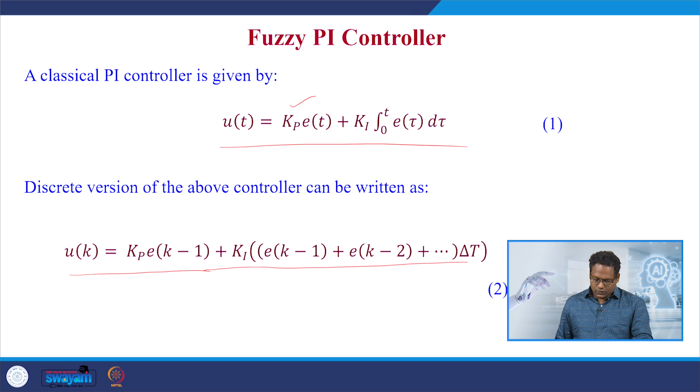...plus ki*(e(k-1) + e(k-2)), and it continues, multiplied by delta t. From the above two equations we can say u(k) - u(k-1) is given by kp*(e(k) - e(k-1)) plus ki*e(k)*delta t, where delta t is the sampling time.

We can say that u(k) is given by u(k-1) + delta u(k), where delta u(k) is a function of error and change in error, given by u(k) - u(k-1), as a function of E, change in error, and higher order forms.

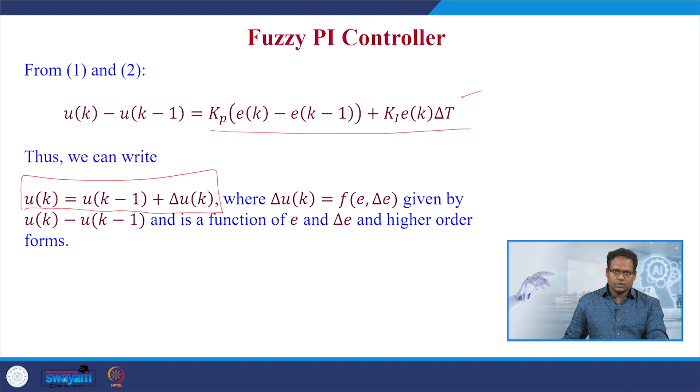Now coming to the fuzzy PI controller, the fuzzy controller has the control structure u(k) = u(k-1) + delta u(k), and using the fuzzy rule base, delta u is obtained, which is an incremental control action that is a function of error and change in error, E and delta E respectively.

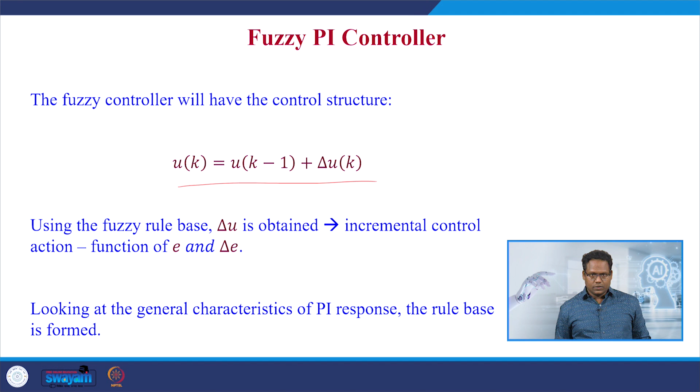Looking at the general characteristics of a PI controller response, the rule base is formed for the fuzzy PI controller. Consider the response of the PI controller with nomenclatures: PL stands for positive large, PM for positive medium, PS for positive small, ZE for zero, and NS for negative small. This is the response relative to the steady state desired output, which is 1 here. The error is given by yd - y, where yd is the desired steady state output and y is the actual output.

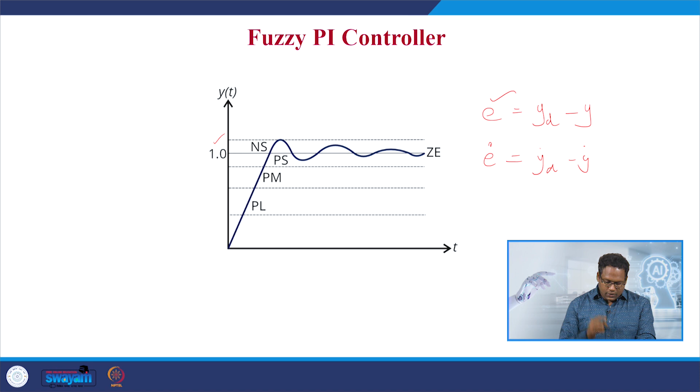From this response we can derive the rules using E and E dot, which is the change in error. Let us take one example: if the error is 0 and the change in error is also 0, then the incremental control action delta u is 0.

If the error is positive small and change in error is 0, then the incremental control action is positive small. Likewise, if the error is positive medium and the change in error is positive medium, then delta u should come out to be positive large.

If the error is positive small and the change in error is negative small, what will delta u be? It is 0, because the change in error is negative, negative small, so it is going to get reduced slowly.

We are here because of the positive small error, and it has to reach the desired value, with the change in error also reducing. This means the actual value, as time goes on, is decreasing towards the desired value, so in that case we do not have to give any delta u, that is why it is 0.

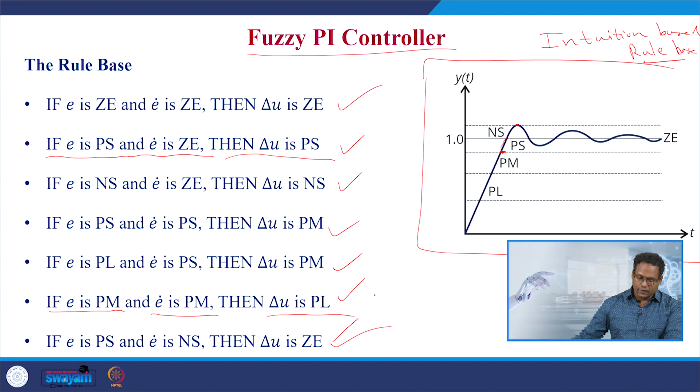Now let us move on to the fuzzy PD controller. A classical PD controller is given by the control law u(k) = kp*e(k) + kd*(e(k) - e(k-1))/delta t. Thus, the control action u is a function of e(k) and change in error.

If you want to have the rules, we can base them on 3 linguistic variables: e, e dot, and u, where u is the output linguistic variable and e, e dot are input linguistic variables.

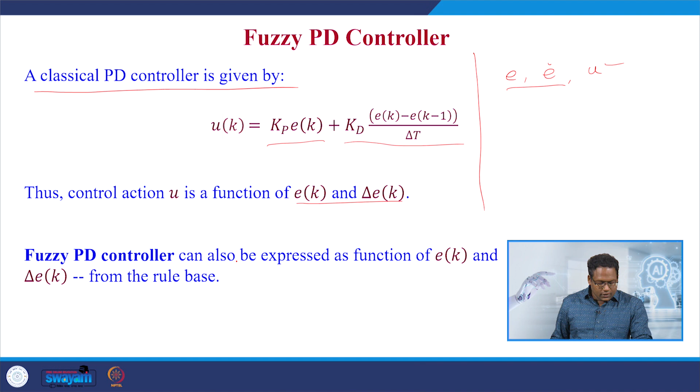Now, the fuzzy PD controller can also be expressed as a function of e of k and delta e of k to form the rule base, as I told. Let us take an example, that is say a 2-link Cartesian position control, 2-link robot Cartesian control, like you need to control the position of the end effector.

I need to go here. So this is your x desired, this is your x actual. Now that is my goal.

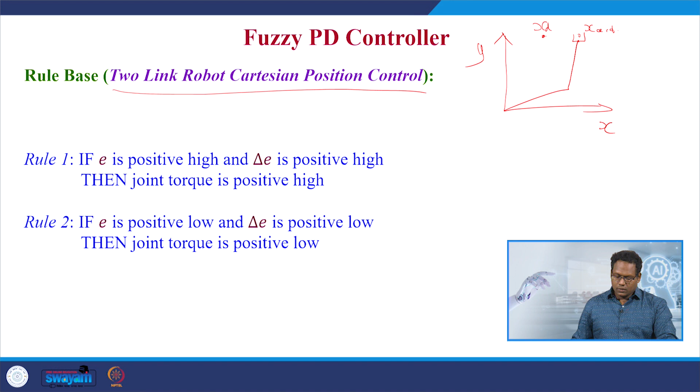So if we are going to derive the rules for this control objective, to have the 2-link planar robot reach a desired position in the Cartesian space, we are having here E, error, and delta E, change in error, as the two input linguistic variables for the fuzzy controller, and U being the joint torque. What will happen in this case?

Rule 1 can be: if E is positive high and delta E is positive high, then the joint torque is positive high, because if the error is too large, then your x actual is very far from reaching the desired value. Also, your change in error is positive high, which implies that at every instant the actual value is not moving towards the desired value of the robotic system. The robot has to reach xd, so change in error keeps increasing, which is positive high, implying that the current robot end effector is not moving towards the desired value xd. So joint torque must be positive high to bring it to the desired value xd. That is what is given in rule 1.

Likewise, let us move on to rule 2. If the error is positive low, that means you are close to the desired point in the Cartesian space, and your change in error delta E is positive low, then the joint torque is also positive low, because of the closeness to the desired position. Your change in error being positive low means that at every instant the actual position of the robot is moving towards the desired position, and hence the joint torque, the control signal given to the robotic system, that is tau 1, tau 2, is also low.

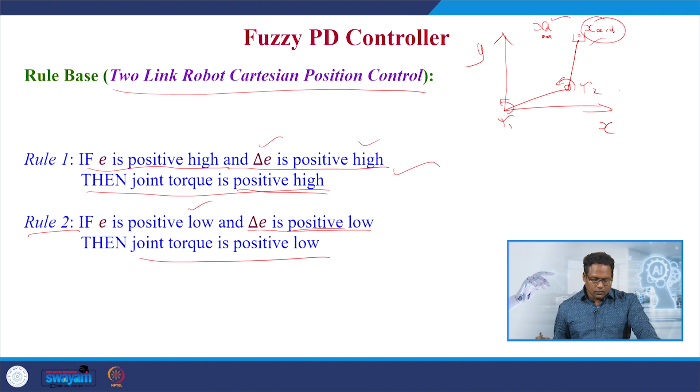Now let us see an example with a single link manipulator PD controller, implementation of a PD controller towards a single link manipulator control. Let the dynamic model of a single link manipulator be given by tau equal to theta double dot plus 10 multiplied by sine theta, where theta is the joint angle from the vertical position and tau is the joint torque.

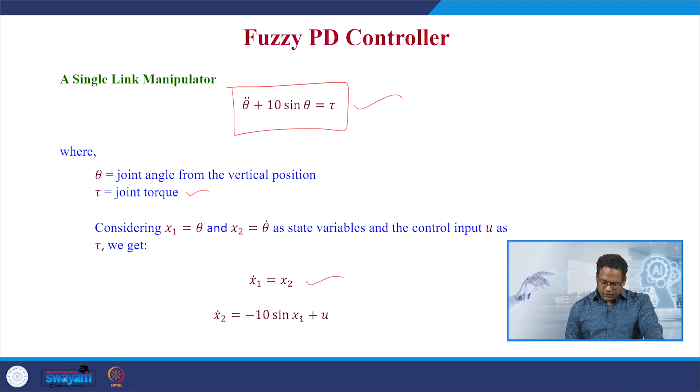Considering x1 as theta and x2 as theta dot as the state variables, and the control input u as tau, we can have the state space model of this single link manipulator as x1 dot equal to x2, and x2 dot equal to minus 10 times sine of x1 plus joint torque u.

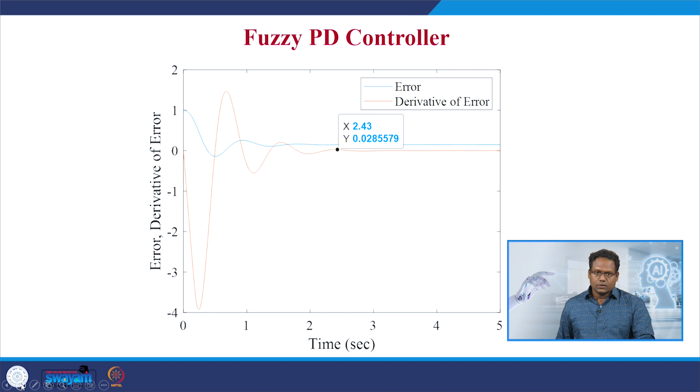With this hard limitation of the control signal, we get the response shown in the slide, where the settling of the system comes around 2.5 seconds, or precisely about 2.43 seconds. Then we have the time history of the error and derivative of the error, where you can see there is a steady state error for the joint angular value, and hence the error is not becoming zero in this case. For a desired value, it is not converging. We need to tune the Kp and Kd control gain parameters to obtain zero steady state error. Now there exists some steady state error in this situation.

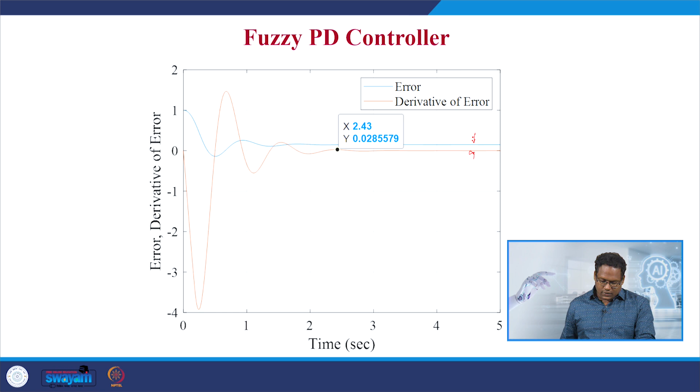Now let us design a fuzzy PD controller for this same problem. So we need to form the rules. Let us say that the fuzzy sets associated with the input linguistic variable E be negative, positive and zero. Likewise, the other fuzzy input linguistic variable has the fuzzy subsets N, P, Z.

So that will give you the output based on your value of fuzzy linguistic variable 1, that is E, and fuzzy linguistic variable E dot. Based on that, E is negative, positive, or zero. Now there are two linguistic input fuzzy variables with the fuzzy subsets being 3. So the number of rules is R equal to Q power n, with the two state variables and Q being 1, 2, 3. So 3 power 2 equals 9 rules formed with this combination of negative, positive, zero for E and E dot.

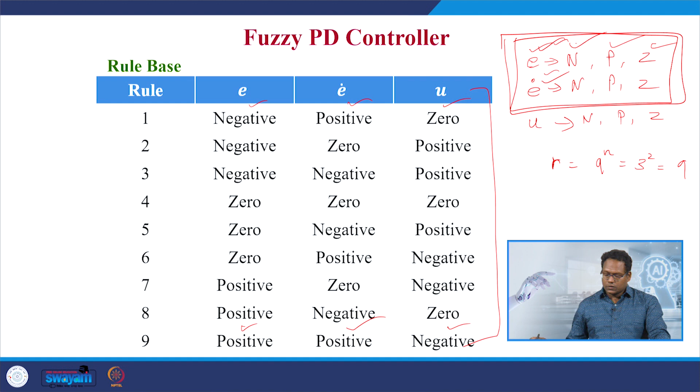Once we form these rules, we find the membership function values for the corresponding rules, for this input membership function value we do the AND operation to give the consequent membership function value.

When we do the maximization of the consequence of all the rules, we get the output distribution. From the output distribution, we can get the crisp value upon defuzzification, using either center of gravity approach or weighted average approach. That crisp value is the control signal u, given to the single link manipulator.

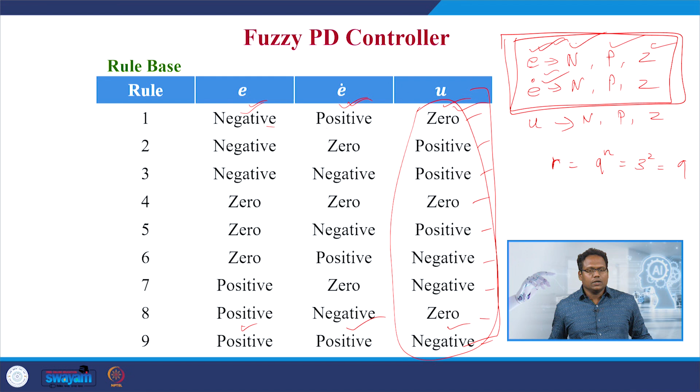So the simulation we have done in this problem is as such. For each instant, you have the crisp output value obtained from the output distribution as such. Because this is a regulation problem, your control signal u converges to 0, as you can see once the complete iteration gets over. Once the complete iteration gets over, your crisp output value is 0, because this is a regulation problem.

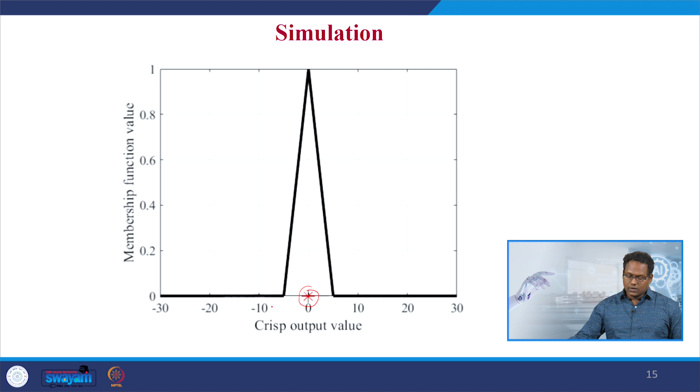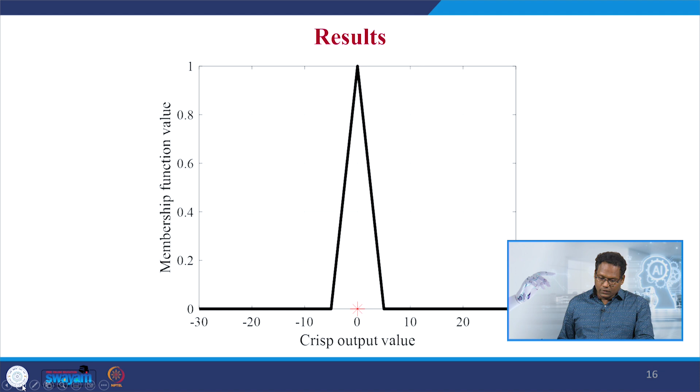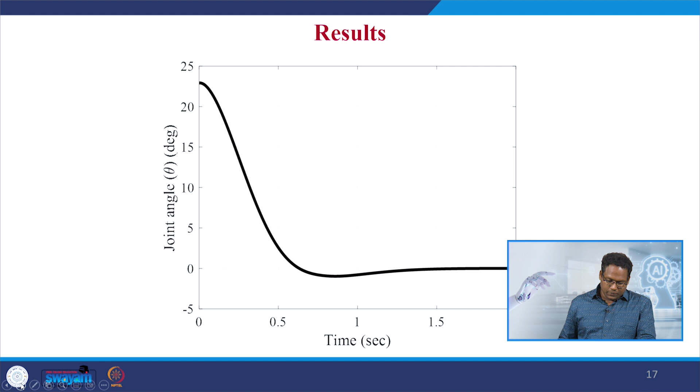These are the results we obtained from this simulation study of a single link manipulator using a fuzzy PD controller. Finally, we have our joint angular trajectory, showing convergence of the joint angle of the single link manipulator. We started with some value around 23 degrees and it converged to 0 degree, hence it is a regulation problem. You start from some non-zero value and make it converge to 0, and hence your control signal in this problem converges to 0 as well.

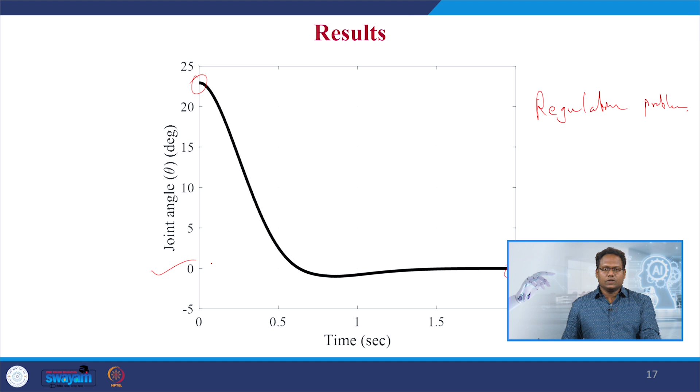Now let us talk about the Lyapunov-based approach. This implies explicitly that we are going to use a Lyapunov function candidate, which is a positive definite scalar function candidate, utilized to develop the rules. So far we have seen rules developed based on intuition, whereas here we have Lyapunov stability analysis in order to form the rules.

Let us have a simple example given by the linear model x dot equal to Ax plus Bu, where x dot is given by a 3 cross 3 matrix multiplied by x plus a 3 cross 1 vector multiplied by u, where A is the 3 cross 3 matrix given by 0 1 0, 0 0 1, 0 0 0, and the B vector is given by 0 0 1. Here the state variables are x1, x2, x3.

The fuzzy subsets for these inputs are positive, 0 and negative for each: x1 positive, 0 and negative, likewise for x2, and for x3 again positive, 0 and negative. So how many rules are we going to have? Definitely 3 power 3, since there are 3 state variables and 3 subsets associated with each, giving 27 rules to form the rule base. The fuzzy subsets for output u are large positive, positive, 0, negative and large negative.

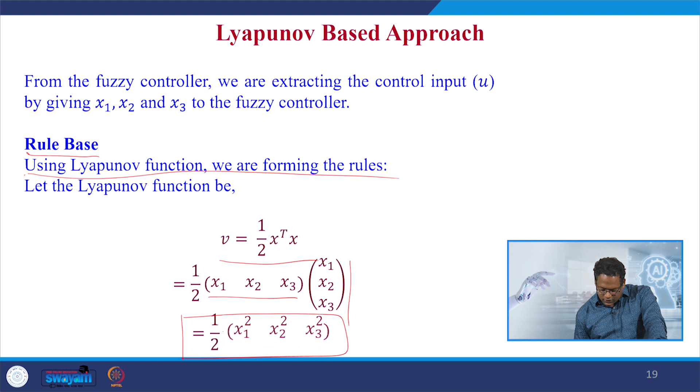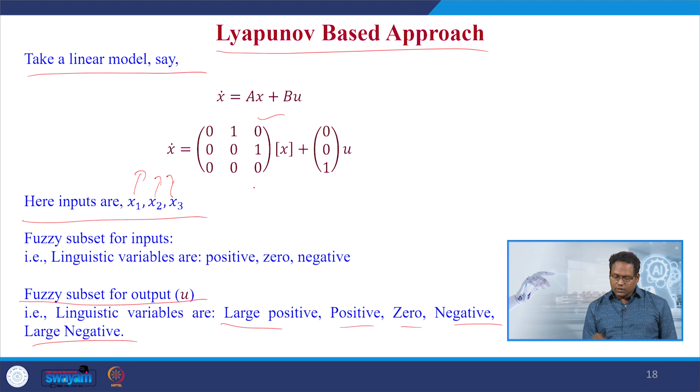Now we want v dot, the time derivative of the Lyapunov function candidate, to be negative definite. So we take the time derivative, v dot equal to x1 x1 dot plus x2 x2 dot plus x3 x3 dot. From the state space model, x3 dot is nothing but u. So we have x1 dot, x2 dot, x3 dot on the left hand side. Expanding that, x3 dot equals the control input u. Thus it is given expanded as v dot equal to x1 x2 plus x2 x3 plus x3 into u.

The objective of this controller is to find a control input u such that the system is stable around x equal to 0, because x equal to 0 is the equilibrium point. From Lyapunov theory we know that v dot should be less than 0, that is negative definite. Now using this we will try forming the rule base for the controller.

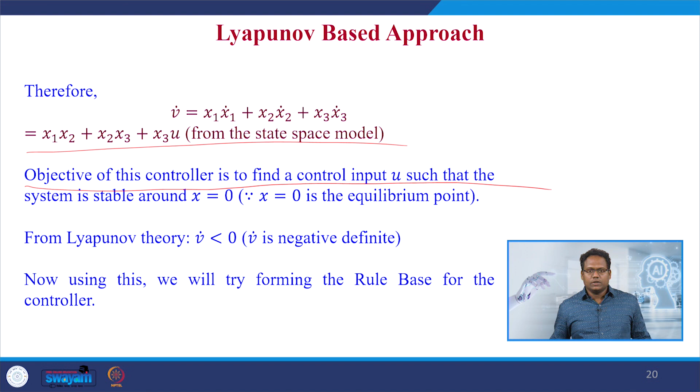First let us consider all 3 state variables x1, x2, x3 are positive. To make v dot negative, we analyze the expression for v dot: v dot equals positive plus positive plus positive into u. Since x1, x2, x3 are all positive, the first term is x1 x2, the second is x2 x3, and the third term is x3 and x3 dot, where x3 dot is u, so positive into u. In that case u should be large negative in order to have v dot be negative.

Accordingly the rule statement is: if x1 is positive and x2 is positive and x3 is positive, then u is Ln, which is large negative. That is how we are done with rule 1.

Similarly, consider the case x1 equal to 0, x2 greater than 0 and x3 less than 0. In that case v dot is 0 plus negative into u, so u should be positive or 0 to make v dot negative. Therefore the rule is: if x1 is 0 and x2 is negative and x3 is negative, then u is positive or 0. Likewise, for different combinations of inputs we get a total of 27 rules.

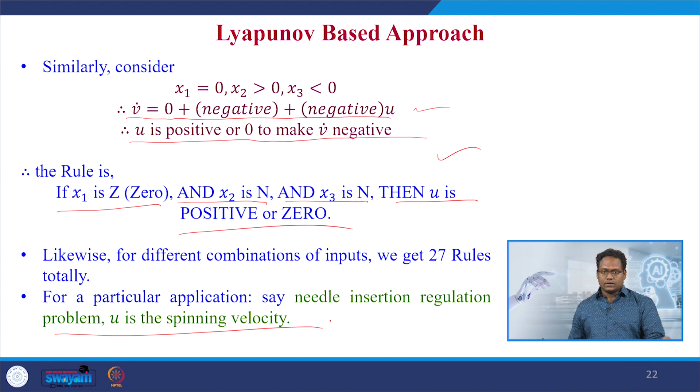This type of Lyapunov-based stability oriented fuzzy controller will be helpful in our percutaneous needling intervention towards minimally invasive surgery, where the control input is the needle spinning velocity and the insertion velocity.

Now let us move on to the second portion of today's lecture, which is TS fuzzy control. In 1985, Takagi and Sugeno proposed a powerful fuzzy model representation which states that if a nonlinear system is represented by a cluster of locally defined linear systems, then the systematic understanding of the nonlinear system becomes stronger, as we already know the linear systems.

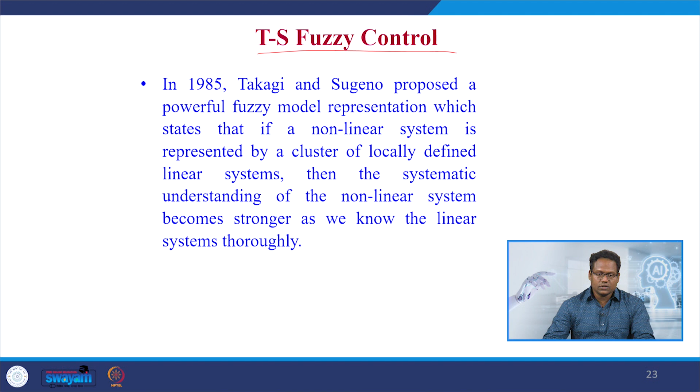The TS fuzzy control has this flow chart, which is quite similar to the Mamdani controller. It is this one — the arrow mark is wrong.

From the plant we get information through the sensor, which is a crisp value converted to fuzzy through fuzzification, and the fuzzy value enters the fuzzy inference mechanism, which does the rule evaluation, from which we get the fuzzy value that gets converted into crisp value by defuzzification, where center of gravity or weighted average approach is utilized, and that crisp value goes to the actuator for which the system is actuated.

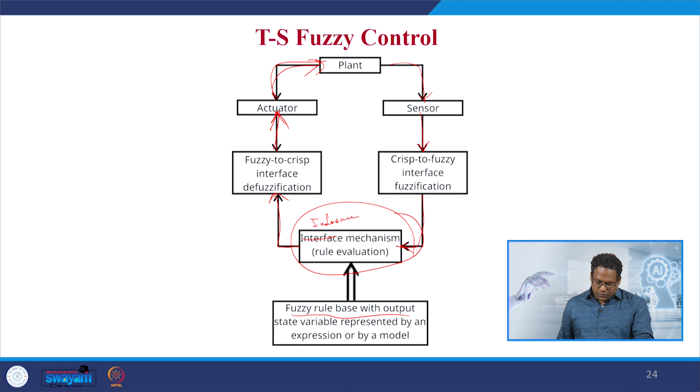Now, in the fuzzy inference mechanism, the fuzzy rule base has output state variables represented by an expression or a model. That is the difference, because we will not straight away be forming the output variable — the fuzzy output linguistic variable is obtained through an expression or a model. Here we are going to see an example where we use a linear model to obtain the fuzzy output variable.

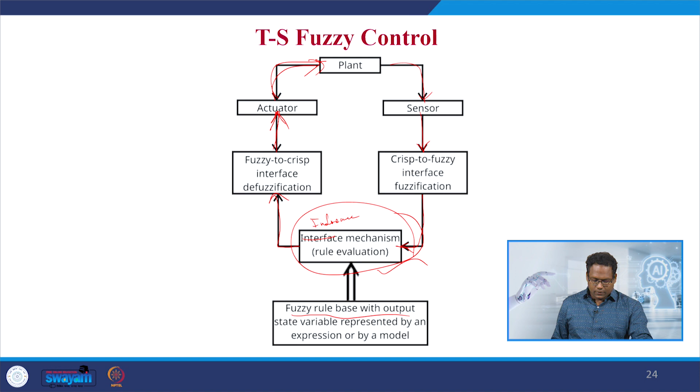Considering a general continuous nonlinear dynamical system described by x dot equal to f of x comma u, where x and u are the n and m dimensional state and input vectors respectively, by fuzzy merging of equivalent linear systems in different operating domains using the TS fuzzy modeling, the above nonlinear system can be effectively modeled.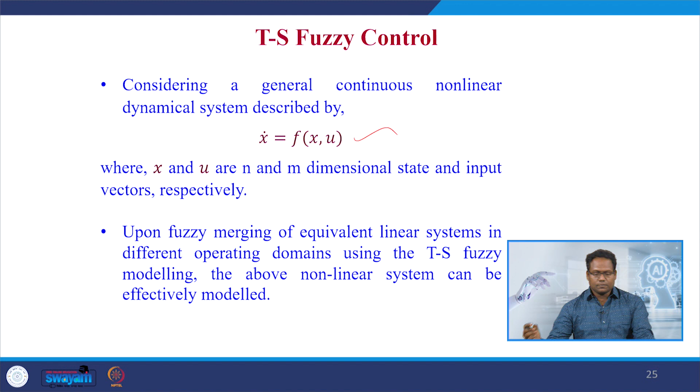In general, a TS fuzzy model is composed of n rules, where the ith rule is given by the following form: Rule I: if x1 is t1i, and x2 is t2i, and so on up to xn is tni, then x dot equals ai x plus bi u, where x is an n dimensional state vector, and I varies for this system up to S, meaning S number of rules.

The number of rules is given by q power n, because each rule represents a fuzzy region in the state space of n dimensions, thus representing total number of rules equal to q power n — that is, the number of fuzzy regions if each state is fuzzified into q fuzzy zones.

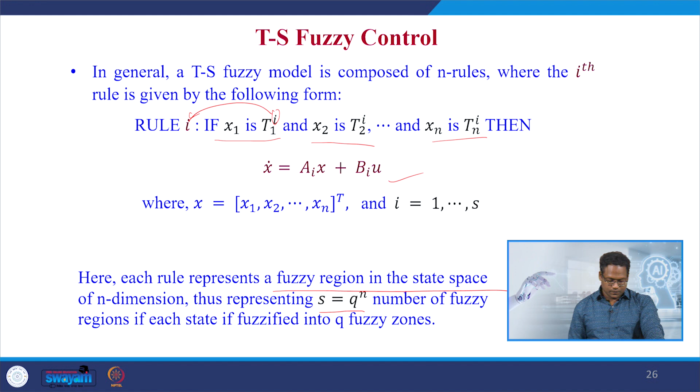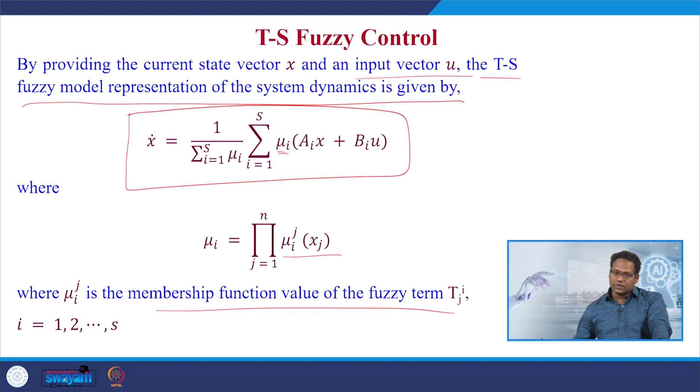In continuation of TS fuzzy control, by providing the current state vector x and an input vector u, the TS fuzzy model representation of the system dynamics is given by x dot equal to 1 by summation over I equal to 1 to s of mu I, multiplied by summation of I equal to 1 to s of mu I times ai x plus bi u, where mu I is given by the product over j equal to 1 to n of mu Ij of xj, where mu Ij is the membership function value of the fuzzy term tji.

Representing the normalized membership function value associated with the ith value by beta I equal to mu I upon summation over I equal to 1 to s mu I, then in the discrete domain the TS fuzzy model representation of a discrete time nonlinear system is given by x of k plus 1 equal to summation I equal to 1 to s, beta I, ai x of k. This is the final expression to get the next state variable given the current state variable.

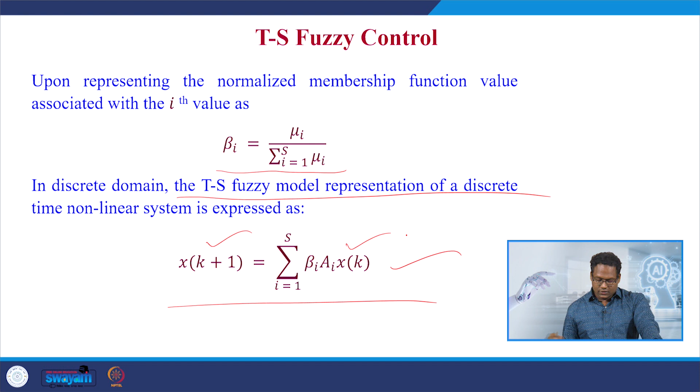Now take an example to understand this TS fuzzy model. Let us consider a single link manipulator whose dynamics is given by x1 dot equal to x2, x2 dot equal to minus g by L sin of x1 plus 1 by ml square into tau, where tau is the control input u, x1 equal to theta is the angle of the manipulator from the vertical axis, x2 equal to theta dot is the angular velocity, and tau is the control torque. The parameters are mass m equal to 1 kilogram, length L equal to 1 meter, and g, acceleration due to gravity, is 10 meter per second square.

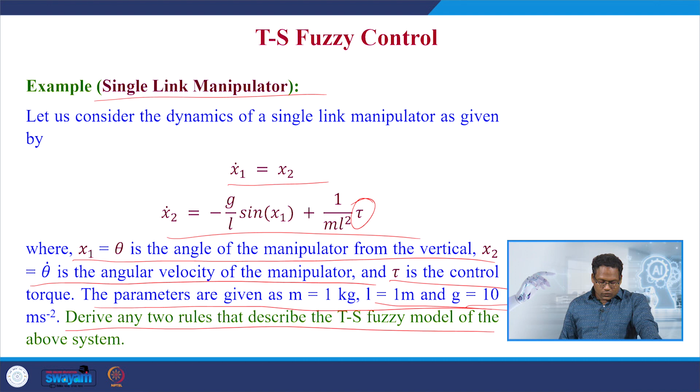The question asked here is: derive any two rules that describe the TS fuzzy model of the above system.

The solution is: let the fuzzy subset of x be PL, PS, ZE, NS, NL, obtained as a combination to a set x1. Precisely, the fuzzy set of variable x1 be capital X1, given by a set of these subsets or elements.

Accordingly, for x2 it is capital X2 equal to PL, PS, ZE, NS, NL, positive large, positive small, zero, negative small, negative large. These are the 5 subsets associated to the fuzzy set x2 as well as x1. So you can say that there are two state variables, x1 and x2, and the fuzzy subsets associated with each state variable are 5.

So it is q power n as the number of rules. So 5 power 2, 25 rules, total rules.

Now only 2 of these rules are asked in the question. If x1 is positive large and x2 is 0, then x dot is given by a1 x plus b1 tau. x1 is basically the joint angle variation, positive large. This is the single link manipulator, and you can have a positive angle, this is theta. So positive large, let us say 85 degrees being x1, and x2, your angular velocity, being 0.

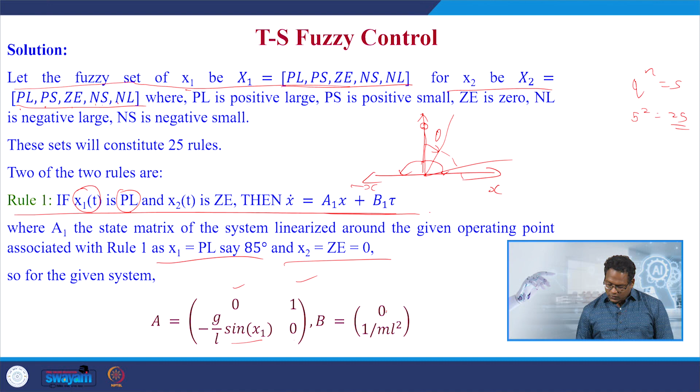For this system you have A and B matrices coming out to be 0 1, minus g by L sin of x1, 0; B equal to 0, 1 by ml square. Substituting the value of g, L and m, we get A equal to 0 1, minus 10 times sin of x1, 0, and B matrix is 0 1.

Now coming to the linearized form of A, given by A1 equal to the Jacobian matrix, which is given by dou f1 by dou x1, dou f1 by dou x2, and the second row is dou f2 by dou x1 and dou f2 by dou x2, the partial derivative of this matrix, that is A1.

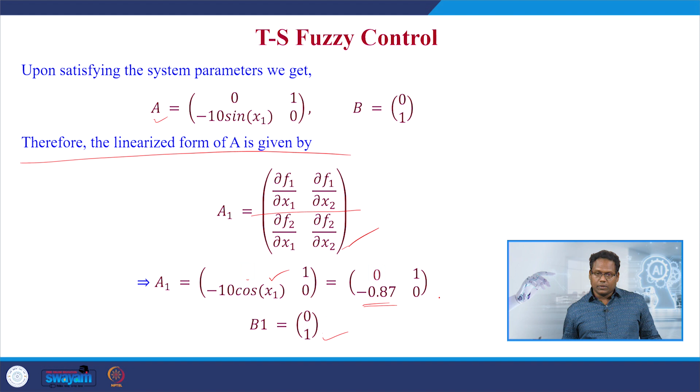Upon linearization, it is given as 0 1, minus 10 cos of x1, 0, which becomes 0 1, minus 0.87, 0, and B1 is 0 1, because here x1 is 85 degrees we are substituting, and accordingly we get minus 0.87, 0 in the second row.

Therefore, rule 1 becomes: if x1 of t is positive large and x2 of t is 0, then x dot equal to ax plus bu, where a is this a1, b is this b1.

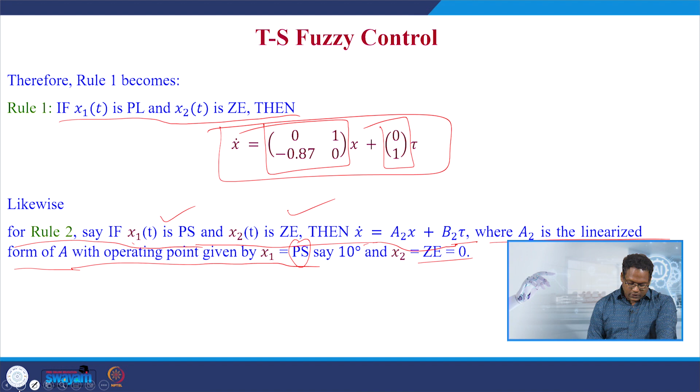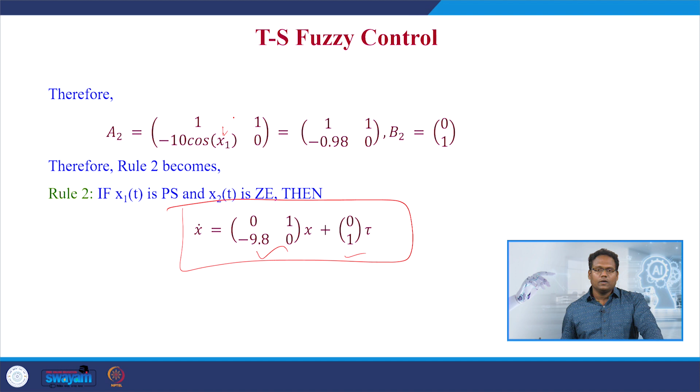Likewise, rule 2: if x1 is positive small and x2 is 0, then x dot equal to a2 x plus b2 tau, where a2 is the linearized form of a with operating point x1 positive small, say 10 degrees, and x2 is 0 again. Accordingly, we get a and b given by 0 1, minus 9.8, 0, and B matrix is 0 1, obtained by substituting the value for positive small. That is how we finished our TS fuzzy model understanding.

Now coming to the conclusion of this lecture: we have seen today fuzzy PI, fuzzy PD, and Lyapunov function based formation of rules. Once the rule base is ready, we can proceed further using defuzzification and get the crisp value, and go for controlling the plant. Then we have seen TS fuzzy control theory along with a simple single link manipulator example.